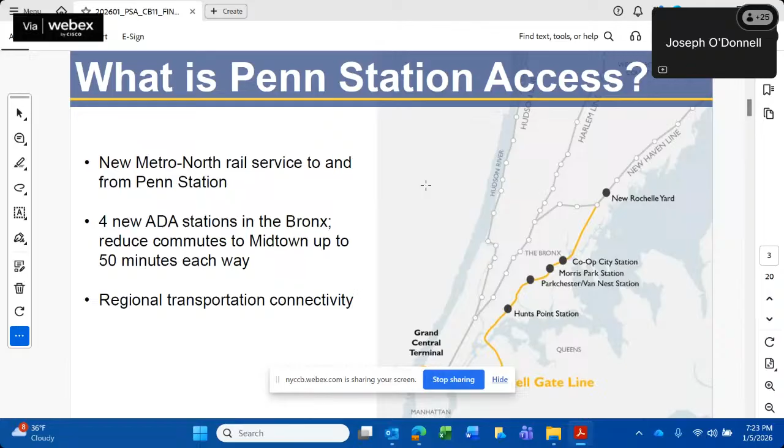Oop, went the wrong way there.

Some of the components, we're not only creating the 4 new stations, we're essentially turning what is being operated by Amtrak as a 2-track railroad into a 4-track railroad. That is one of the beauties of this project - it doesn't require wholesale property acquisition and new tunnels and things of that nature.

There are some minimal property acquisitions for the siting of our vertical circulation elements. We need to get folks into and out of the station, so we are going to have to put our staircases and elevators someplace outside of the actual track. So there was some property acquisition required for that, but by and large we're really maximizing the existing Amtrak footprint here and creating the new service.

In order to do that, we're going to be creating or updating 19 miles of track, 4 new interlockings - interlockings are what are used to switch trains from one track to another - we're going to be reconfiguring one interlocking, and we're going to be creating 4 new substations.

Those are the power substations that supply the power not only for our service, but we're also going to be upgrading one of the existing substations along the alignment to bolster and bring Amtrak's infrastructure to a state of good repair and maximize their ability to maintain service for the next 50 plus years.

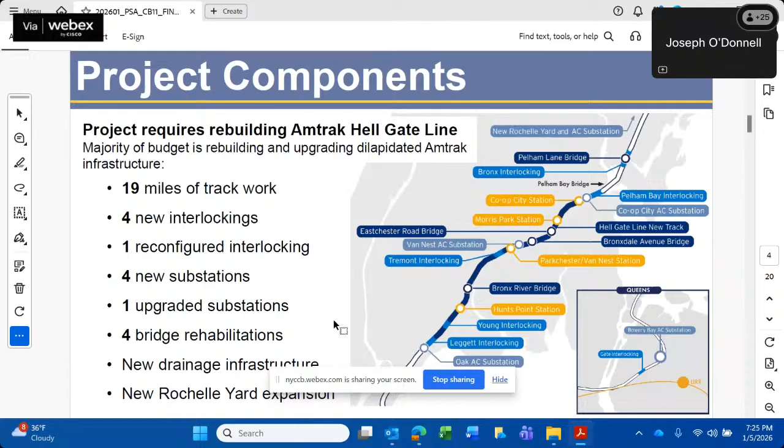We don't have to wait for a train to come out of Stamford or Bridgeport or even New Haven to get up into the Bronx in order for Bronxites to utilize service. Trains will be stored locally, closer in the New Rochelle Yard.

The crux of what I'm here to talk to you about today is just to give you an update on the schedule. As I mentioned, we updated our board on this in October of 2025. We had originally come out of the gate with an idea that we were going to deliver service by 2027 - originally August of 2027 - and that was contingent upon a whole host of agreements from Amtrak.

As I mentioned, we are maximizing the Amtrak right-of-way to create a 4-track railroad. So not only do we need Amtrak's permission to be on their property, we need their oversight, we need their concurrence on plans. There were a lot of deliverables that we were expecting on their side, that they entered into a contract with us to deliver, that they weren't living up to.

We identified some of those problems early on in 2025, and as I mentioned, we tried to mitigate those delays or impacts by working with Amtrak on long-term outages. What those long-term outages allowed us to do was shut down one track of that 2-track railroad so that our folks could focus on doing the work safely and efficiently without fear of a train bearing down on them, or without negatively impacting Amtrak's ability to run service, keeping all of Amtrak's service on one track.

They allowed us to do that between Memorial Day and Labor Day, and then we evaluated where we were at the end of that. We did that twice with them, once in 2024, once in 2025. And then we determined at the end of those long-term outages that we couldn't move the schedule back to get it to the point where we could have all 4 stations delivered by 2027 as anticipated.

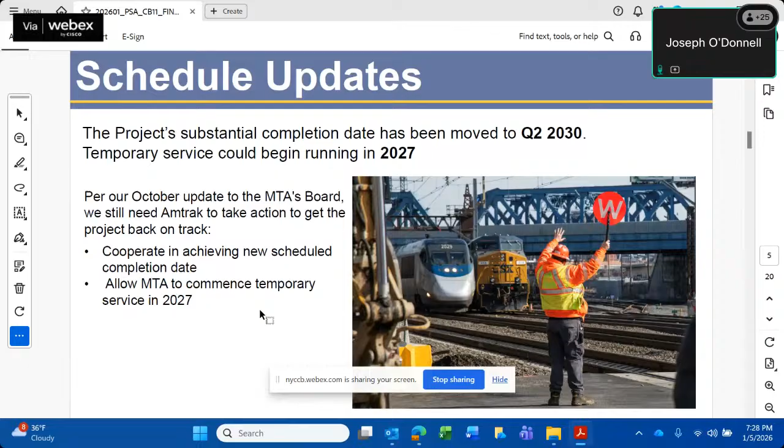What we did present to Amtrak and our board was the fact that we do believe we could deliver limited service by 2027, which would allow us to start temporary service in 2027 and allow us to finish all of the rest of the stations, the permanent stations, by 2030.

The reason we believe this to be the case is if you take a look at past experience on similar projects, we delivered the Long Island Railroad's 3rd track project, which was a similar upgrade and expansion of existing infrastructure, with in fact the same contractor - the Halmar International joint venture currently working on this project is the same joint venture that delivered the Long Island Railroad 3rd track project, which was delivered on time and $100 million under budget. So we know we have the expertise, we know we have the right personnel, we know we have the right contractors on board to deliver this project.

The one wild card has been Amtrak and Amtrak's ability to deliver on their commitments. We saw some of this in East Side Access, the Grand Central Madison service with Long Island Railroad trains terminating at Grand Central. That project was plagued by delays. We think we have the right team, the right contractor, the right plan. We just need Amtrak to get on board.

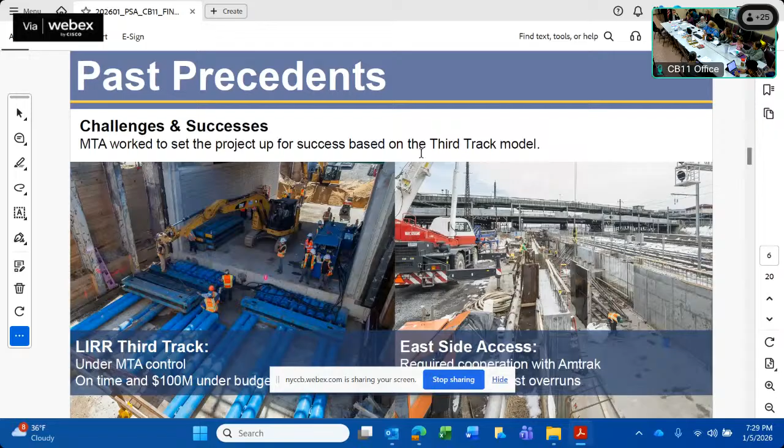There are some instances where we feel they've fallen short. Again, I don't mean to suggest the MTA is wholly without blame, our contractor could have done a better job in some instances, but by and large, when it comes to schedule, it's really contingent upon Amtrak. In the first 2 years of the project, we were promised 38 outages in year 2 and 10 weekend outages in year 1.

So a total of 48 outages. This allows us to do work consistently and effectively and efficiently, because if our crews have to get on and off the tracks every 15 minutes, every half hour, every hour in order to let a train pass, it doesn't lend itself to effective and efficient work. They were only able to deliver on 7 of those 48 outages, or 14%, in the first 2 years.

Similarly, from a staffing standpoint, they did not have enough staff to support the work, and this is a rule or regulation they've imposed upon us and themselves. They want someone looking over their shoulder or our shoulder while we do this work. As the owner of the right of way, that's fine, that's their prerogative. But if they don't have the staff to allow us to do the work, it's counterintuitive to getting the work done.

There were 98 days where they did not have an Amtrak foreman available to oversee our work, and 77 days where they didn't have an electric traction lineman available to oversee that work. So the inconsistency in the rules of how this work needs to get done and can be done is limiting our ability to deliver the scheduled work as anticipated.

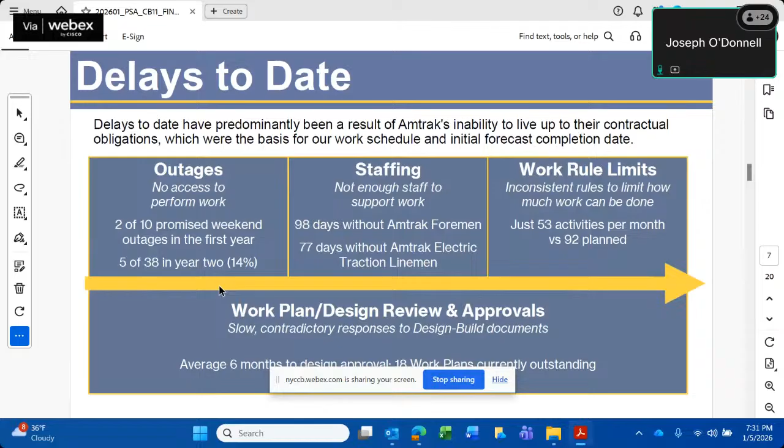So we've asked publicly for Amtrak to take responsibility. We need them to be accountable because we believe, and again, this is not about finger pointing, this is laying out the facts at this point. We understand there will be time enough at the end of this project to have very hard conversations about who owes who what to get this job delivered. But we want to get this job delivered, so we can start this service for the folks in the Bronx and get out of everybody's hair.

There has been some progress since October. There has been conversations, there has been a willingness to make additional commitments, but we had those commitments or similar commitments when we started this project. In fact, the schedule we arrived at and presented to the public was based on those commitments. So commitments are great, but we need action.

We need Amtrak to take action to get this project back on track. Unfortunate railroad pun. So we need them to cooperate in achieving a new schedule and a new completion date that they can live up to. We need them to allow us to commence the temporary service in 2027, because again, we can't run service on their right of way without their permission.

And then, like I said, we'll sit down and have a conversation at the end of this, or as things progress, and we'll hash out the cost impacts, because as you know, time is money, and as this project stretches out longer than anticipated, there are resulting cost impacts associated with that.

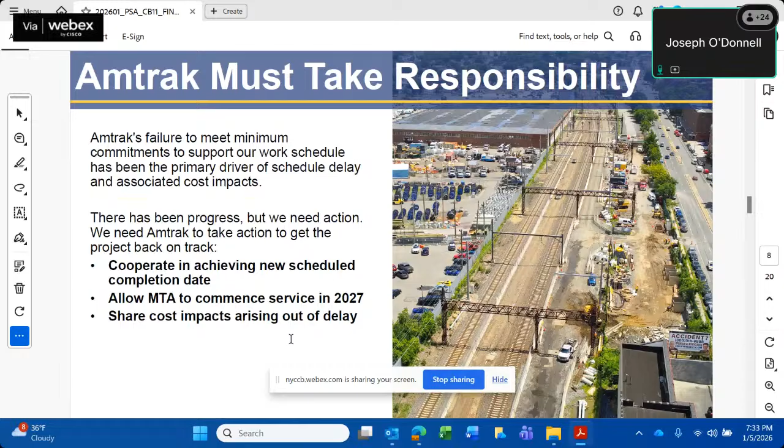So in order to reach the 2030 date that we're now projecting, we need Amtrak to commit to double block outages. We need them to eliminate this requisite they have for an outage for track hardening. They require us to leave the track alone after we work on it for a week before they can run trains on it and we can do any more work. We would like them, since they're the experts and it's their system, to take over the catenary and signal power work for this 19-mile section of track. It's the Amtrak service that runs on the catenary system.

They know the ins and outs, so they could do this and deliver this work much more effectively and efficiently than us, which would allow us to pick up some of the slack. We need them to increase the force account, essentially those overseers for us to do our work, and we need them to embrace design build.

One of the real barriers to effective delivery of this project is that they have to review every document, every plan, every drawing in more detail than one would think necessary, because they have not yet embraced design build. It's their prerogative, but it slows things down.

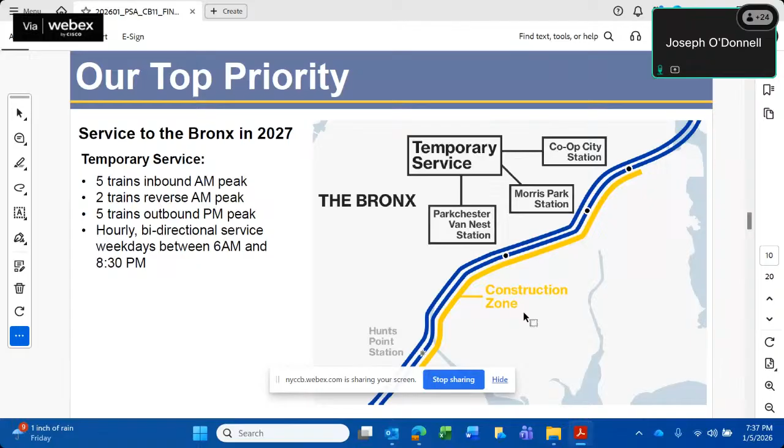And then there would also be hourly bi-directional service between 6 a.m. and 8:30 p.m. This is our plan to minimize the negative impacts of the schedule delays and at least deliver this temporary service by 2027. We still are beholden to Amtrak to allow for this to happen, so just want to make you aware of that, and we will keep you up to speed on those conversations as they happen. Now to talk a little bit about the good news of 2025, what we were able to progress and get done.

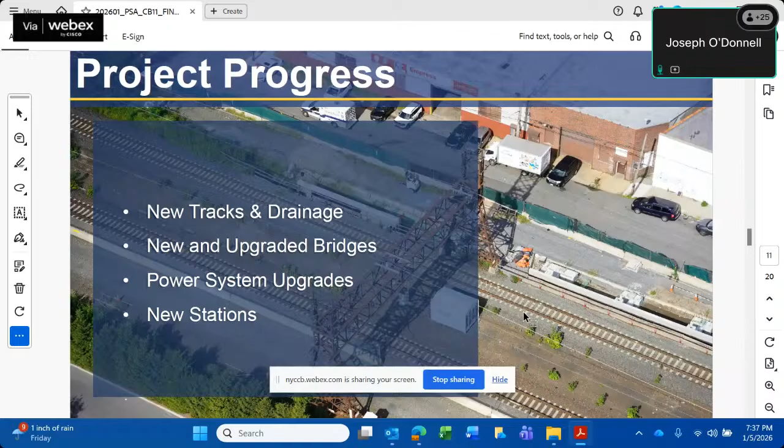We were able to make a lot of progress with the new tracks and drainage. We've upgraded multiple bridges and in fact installed a new bridge span. We've upgraded the power systems, and as you'll see, the stations in all 4 areas are starting to take shape.

With regard to the new tracks and drainage, Leggett interlocking was successfully commissioned in July of 2025. As I've mentioned before, Leggett was critical for us because that's the southernmost interlocking, and interlockings are how we move trains from one track to the other. This allowed us to move Amtrak trains from track 1 to 2 or 2 to 1 as far south as humanly possible before it got into the work area, allowing us to do more work more effectively and efficiently.

Over at Parkchester Van Nest, we've gotten some track work done. The existing track 1 demolition is complete, and we've installed the new track 3 and the new drainage system.

Looking at the components installed across the project corridor so far, we've installed 54% of the project's needed manhole structures, 47% of the drainage pipe, and 59% of the detention tanks. Because this is a low-lying area prone to flooding, we're going to remove that water as it accumulates and send it off to detention tanks to be dispersed.

As far as those new bridges and upgraded bridges go, at Bronxdale Avenue Bridge, phase 1 is complete. The girders for track 3 were installed at the Eastchester Road Bridge. North Bay demolition and footing installation is complete at Pelham Lane Bridge.

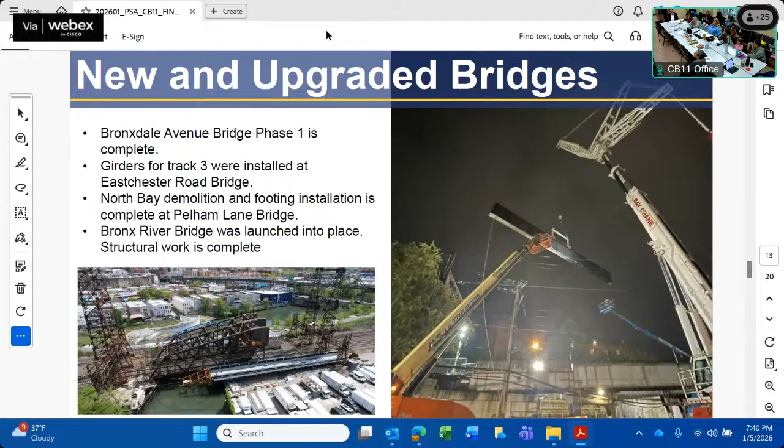So there's a lot that needs to get done. Again, not only for our service, but to maintain the efficiency and effectiveness of Amtrak service - we're effectively bringing their service. This is work they would have had to do in the next several years to ensure the longevity of their service, but we're doing it for them as part of this project.

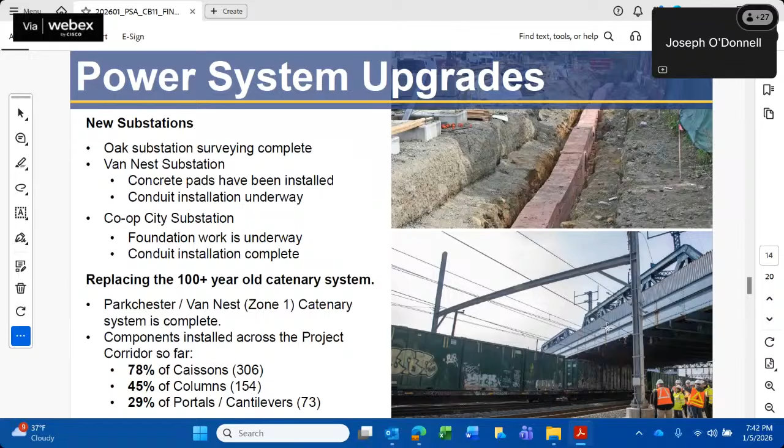So the money makers here - I feel like a lot of this stuff goes unseen and is sort of stealth because it's in the right of way, it's infrastructure, so folks don't really see the work taking place. What signals for you all, or the layperson, that something is happening is really seeing the stations themselves start to take shape.

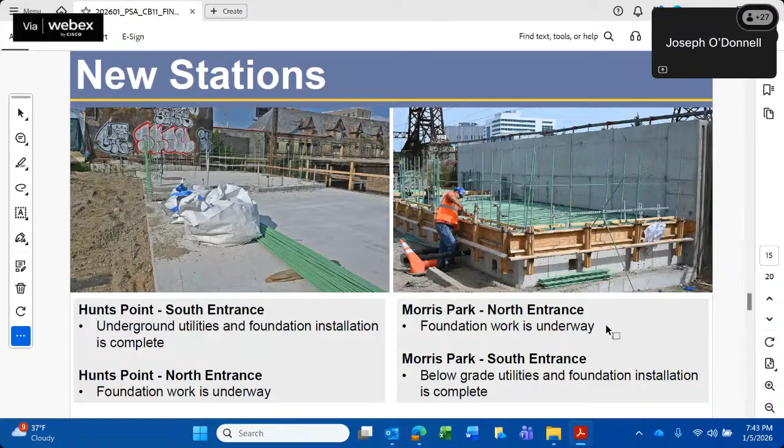Oops, sorry, went the wrong way.

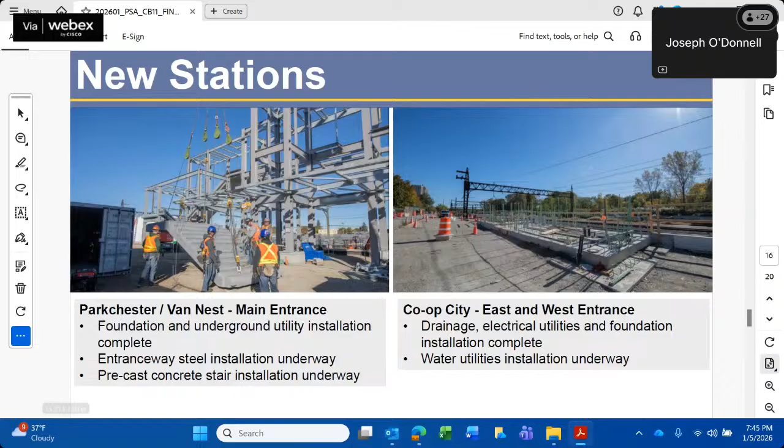On the right-hand side of the screen at Co-op City, at the east and west entrance, the drainage and electrical utilities and foundation installation is complete, and the water utility installation is underway. So a lot of foundation work is going on at all four station locations, with some rebar coming up out of those foundations. And at Parkchester Van Nest, at the main entrance, you've already got a lot of the upright steel and the stairs going in. So again, a lot of progress on those station entrances.

I won't spend too much time tooting our own horn. I have Molly Hollister, Eric Wisdom, and Caitlin, also from our community outreach consultant team. They do a great job going out into the community — these are examples of them presenting to community boards like yourselves at all four station areas, meeting with elected officials, civic groups, schools, and participating in STEM events. This is a once-in-a-lifetime opportunity for the schools along the alignment to bring this mega project being delivered in their backyard into the classroom, tying it into what students are learning in science, technology, engineering, and mathematics.

The outreach team does a great job bringing in engineers, geologists, and designers to talk to the students, giving them tangible examples of why they need to learn algebra and geometry. I'm in communications because math wasn't my thing, so I would have appreciated someone explaining why I needed to learn algebra back in the day. It's a way to tie what's going on in their own backyard practically into what's happening in the classroom.

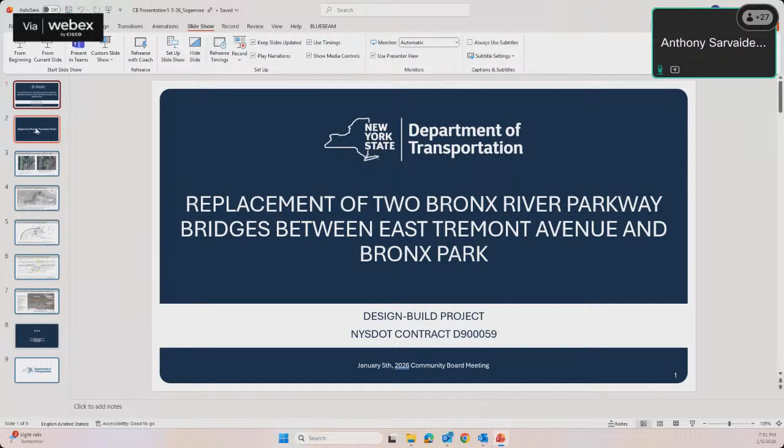Thanks, Rolando. Good evening, everyone. I'm the project manager for Yonkers Contracting and also the community liaison. As Rolando said, this is a small portion of the job, focusing here on the Sagamore Street and Ranaqua Parks area for the new access road.

First, I'll go through a slide showing the current conditions and setup. On the left is the Ranaqua Parks Yard at the end of Birchall Avenue. Currently there's an on-ramp from Ranaqua, an off-ramp from the Bronx River Parkway, and what is on paper supposed to be an on-ramp from the Highway Department, but is actually used as both an on and off-ramp from the Highway 1 Precinct facility. The shared use path through the Bronx also passes along this route, currently following this green path where it crosses these on and off ramps, crosses sidewalks within the Ranaqua Parks facility around the front of the building access, and then crosses around the back of the loading docks before continuing south on the shared use path.

Currently proposed, in the next few slides, is how to access the existing Highway 1 facility, how the driveway would look, the new entrance and exit ramps, and the new shared use path.

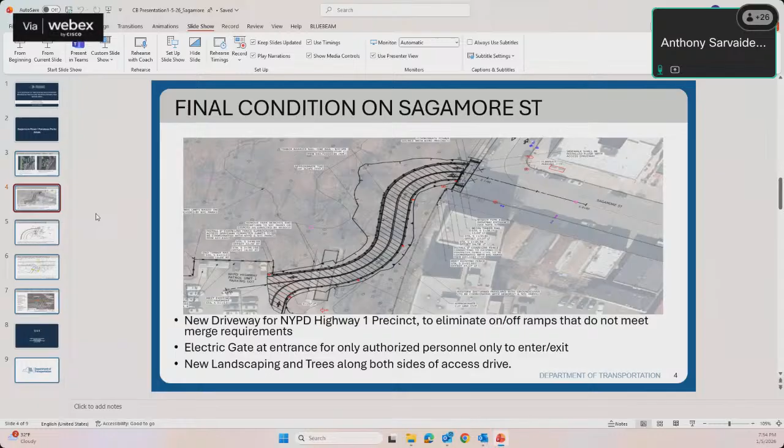A little further detail: the gate location would be along the line of the existing gate. There's currently a fence line running along the buildings and sidewalks. The curb cuts and slope down on both sides, meeting all handicap safety standards. A couple of trees here would need to be removed, but the location and design of this road was chosen to minimize impact on vegetation in the area, and to allow for replanting of multiple trees on both sides of the road.

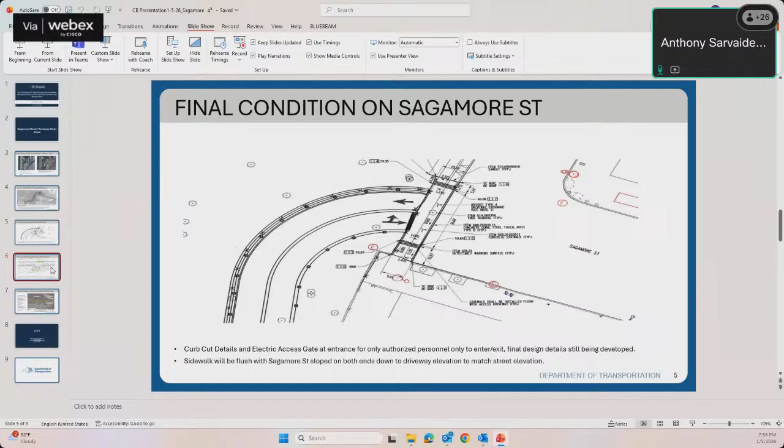The next slide shows the final setup for the on-ramps. There will no longer be an off-ramp on the Bronx River Parkway main line northbound. The Ranaqua Parks facility would be able to enter the Bronx River Parkway from their own ramp, and the Highway 1 facility would also have an on-ramp with a merging lane that meets new safety and highway standards, allowing cars to safely merge back onto the parkway. There would be no public access through either of these on-ramps.

This also allows for a new realignment of the shared use path, taking it out of the Ranaqua Parks facility. You can see the existing shared use path here. New construction would start in this area, crossing the two ramps. Instead of coming down this ramp as it does now, it would follow along the northbound side of the Bronx River Parkway.

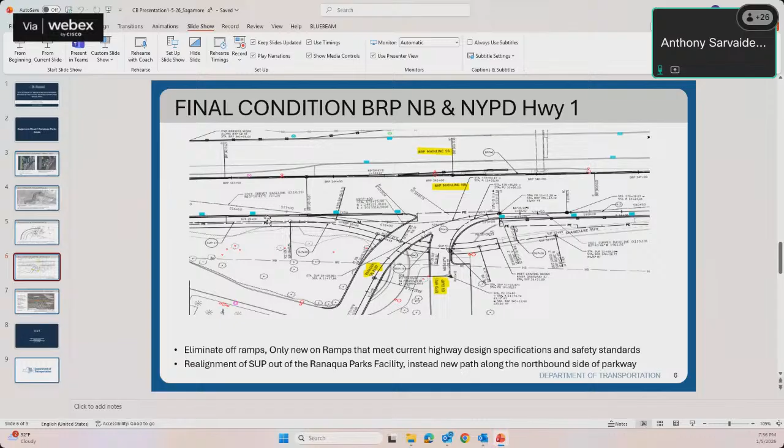In the next slide, I'll show it a little further. Here you can see in orange the new shared use path, which would be completely separate from the Ranaqua facility altogether. It then splits to continue south on the old ramp here, and the old way goes down to 180th Street underneath the bridge. With the new bridge, there will also be a new path coming across the top on the northbound side.

The ramps in green are the on-ramp and off-ramp that would be eliminated. The new ramp in dark gray is the new on-ramp from the Parks facility, and the ramp from the police station would tie in together, with a merging lane to join the northbound Bronx River Parkway.

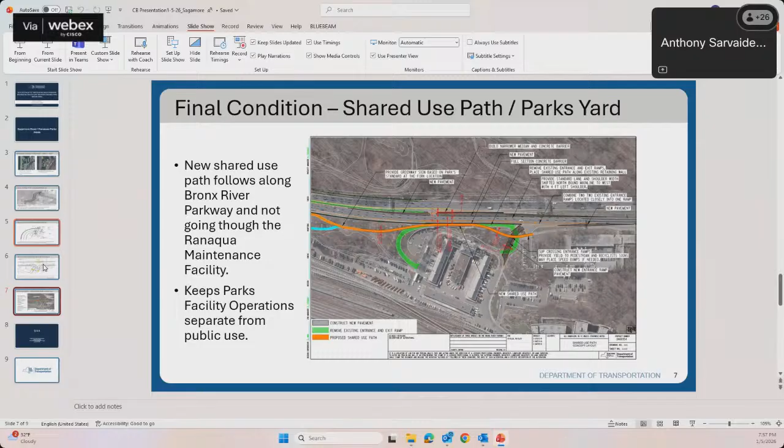I think that's everything I had on my notes. I do have Q&A as well, but I know we pushed that off to the end. I'll cut and paste this and put it in the chat for any questions or ways to contact us. Thank you. Those visuals were hard to see.

Okay, that's great. We're going to start with transportation. We could go transportation, then parks, okay. Let's start with transportation from the committee. Anybody from the committee co-chair? Would you like to say something, Amy? No? On which, transportation? Transportation first. Right, so Metro North, or okay, either one of those two. But first of all, as far as this project, from my understanding... wait, we're doing Metro North first, sorry if you misunderstood. We're doing transportation first and then parks. So Q&A for transportation, okay, Metro North presentation, sorry. All right, okay, then back to Metro North.

You said something, so I guess this is to Joe O'Donnell. You mentioned eliminating the track hardening to try to save time. How is that beneficial? Is there any repercussion in trying to fast track that? And when you say reducing time by 50 minutes, do you mean from end to end it'll take 50 minutes, or are you saving 50 minutes in overall time?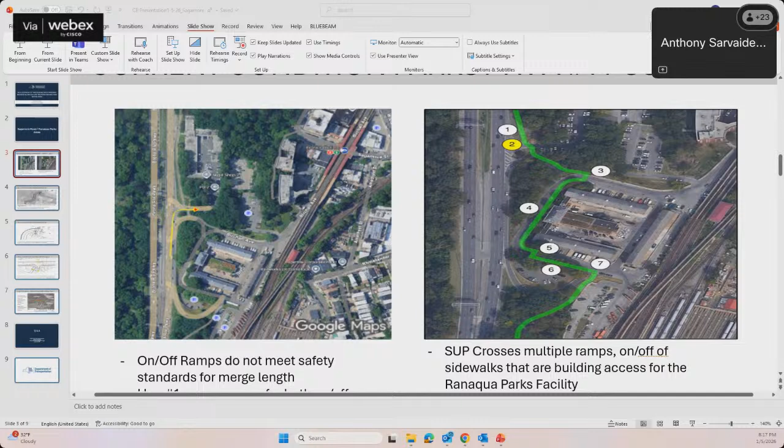And the DOT—the design's been ongoing before I got involved in this as well. So did you plan on informing the building, or holding some kind of infrastructure update for them? Two buildings—the two buildings? Does anyone—you're going right in the backyard, right out their kitchen window basically, and nobody's speaking to them? Nobody reached out to me, and I live in the area.

As chairwoman, this seems to be a major item that affects the building and the community, and it seems to be coming quicker than my Metro North item. So I could only recommend, as a board member, that they come back to their next Parks meeting, because there's a lot happening here. It's just happening already.

I understand that fully. As we stated to Jeremy and Cynthia when we met with them, we received the permits from Parks to do this work. This came at the request of the agencies, and we're adhering to facilitate access for the highway patrol unit. Parks wants a dedicated entrance for their department, and then there's the Sagamore entrance. Any disturbance of vegetation, as Anthony said, is minimal impact, and anything removed in this pathway will be replaced in kind. Again, we're not opposed to doing a walkthrough with whomever from this committee wants to do one, but we'd have to coordinate with both Parks and NYPD, so they could also be part of this walkthrough.

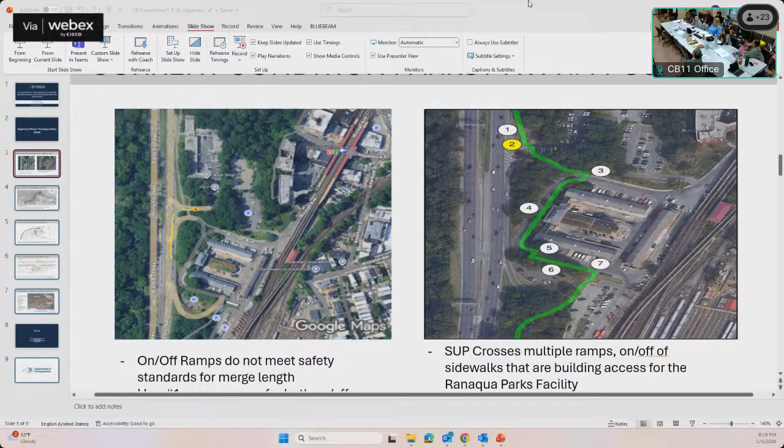Parks is on this call, there are a few people from Parks, but NYPD is not. Nothing has been discussed with the community? I saw Valerie, I saw Aponte, Katharina, there might be others on.

Can somebody from Parks answer why the community hasn't been informed or anything mentioned to the people who live there? Crickets, not getting an answer. Because I live there, I would have known.

I hear what he said, he's correct, it's a fait accompli, but could there be a town hall where the whole neighborhood comes out and has their voice, with Channel 12, Channel 6, whatever, so they can all speak at the same time? I have five representatives here, I'm sure that whole building is not too happy about this. The odds are it can't be stopped, but at least you get your voices heard, and you're not getting answers here.

All right, can we do that? Mr. Chair, I think it's a good idea. It's an idea.